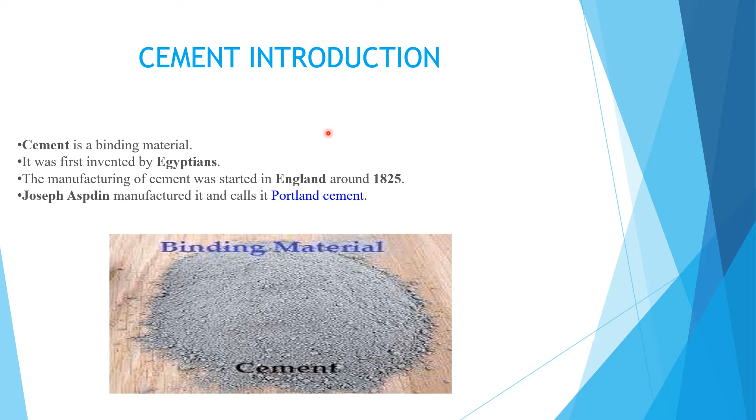What is Portland cement? Portland cement is a binding material in the form of a finely ground powder, usually gray, that is manufactured by burning and grinding a mixture of limestone and clay, or limestone and shale.

Ordinary Portland cement has been classified as OPC. OPC full form is Ordinary Portland Cement. Next, OPC 33 grade, IS 269 1989. Next, OPC 43 grade. There is also OPC 53 grade.

Because it is a major compound of this building material, cement is an extremely important construction material. It is used in the production of many structures that make up the modern world, including buildings, bridges,

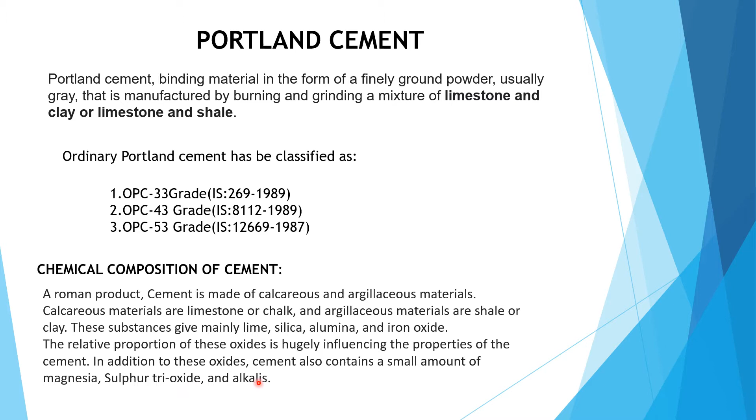Next, composition. CaO, calcium oxide, controls strength and soundness. Its deficiency reduces strength and setting time. Its composition is present at 60 to 65%.

Next, SiO2, silicon dioxide, gives strength. Excess of it causes slow setting. Its composition is 17 to 25%.

Next, Al2O3, aluminum oxide, is responsible for quick setting. If in excess, it will lower the strength. It is present at 3 to 8%.

Next, Fe2O3, ferric oxide, gives color and helps infusion of different ingredients. It is present at 0.5 to 6%.

Next, MgO, magnesium oxide, imparts color and hardness. If in excess, it causes issues. Its composition is 0.5 to 4%.

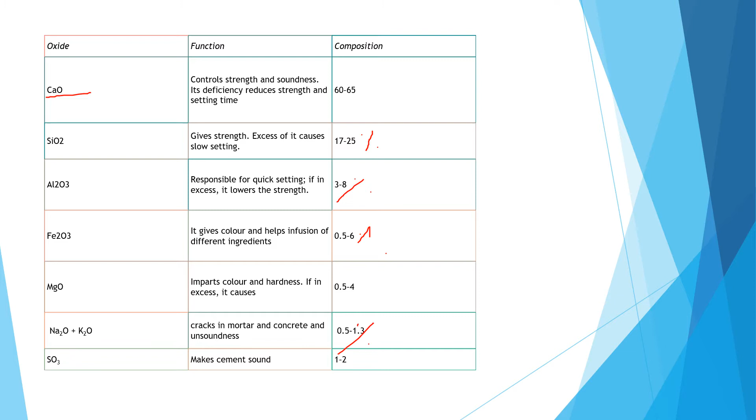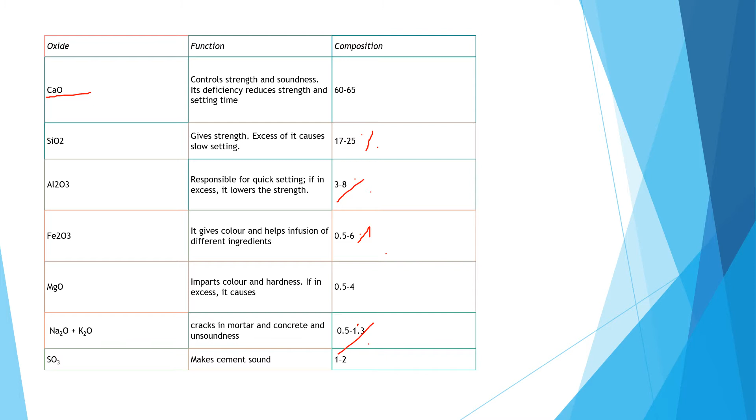Next, Na2O plus K2O, sodium oxide plus potassium oxide, causes cracks in mortar and concrete, and unsoundness. It is present at 0.5 to 1.3%. Next, SO3, sulfur trioxide, makes cement sound, present at 1 to 2%.

Now, function of ingredients. Cement ingredients: Lime, CaO. Lime or calcium oxide is a calcareous and chief component of cement, present at 60 to 65%. It is obtained from chalk and limestone and induces strength in the cement. A sufficient quantity of lime is required to make silicate and aluminate of calcium.

Next, silica, SiO2. This is the second largest component of cement, obtained from sand and argillaceous rocks. A sufficient amount of silica helps to form dicalcium and tricalcium silicate, which impart strength to the cement.

Next, alumina, Al2O3. Alumina or aluminium oxide is obtained from bauxite or clay, which contains aluminium. Its percentage limit is between 3 to 8%. It induces the quick setting properties of the cement.

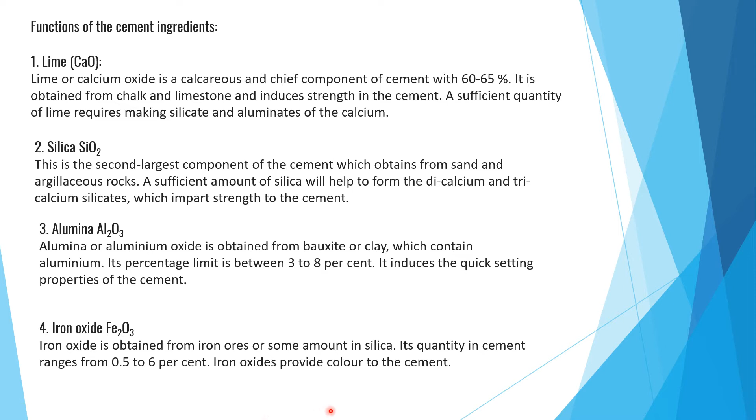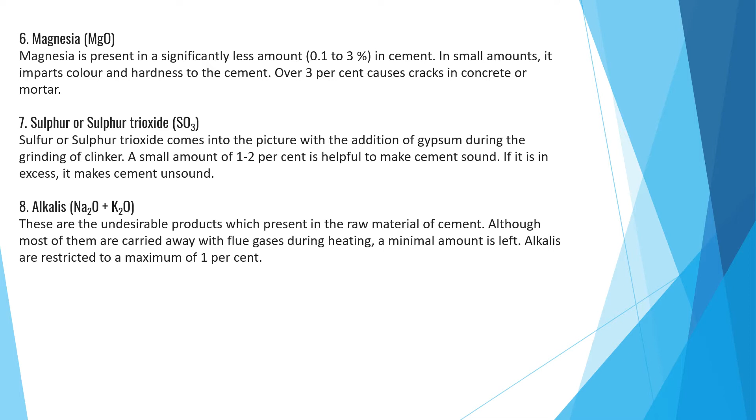Next, magnesia, MgO. Magnesia is present in a significantly less amount, 0.1 to 3% in cement. In small amounts, it imparts color and hardness to the cement. Over 3% causes cracks in concrete or mortar.

Next, sulfur or sulfur trioxide, SO3. Sulfur trioxide comes into the picture with the addition of gypsum during the grinding of clinker. A small amount of 1 to 2% helps to make cement sound. If it is in excess, it makes cement unsound.

Next, alkalis, Na2O plus K2O, sodium oxide plus potassium oxide. These are undesirable products present in the raw material of cement, although most of them are carried away with flue gases. During heating, a minimal amount is left. Alkalis are restricted to a maximum of 1%.

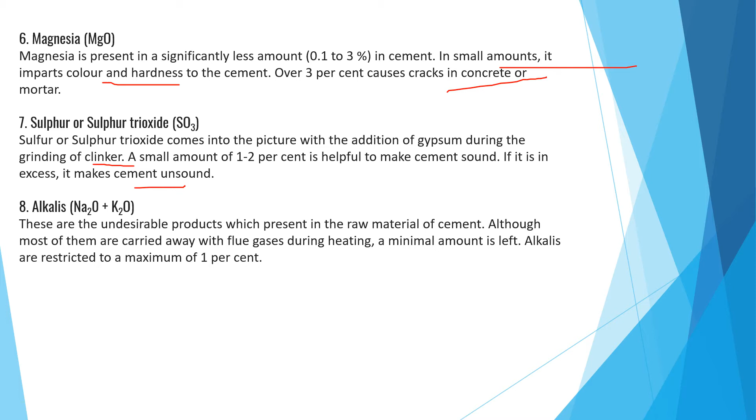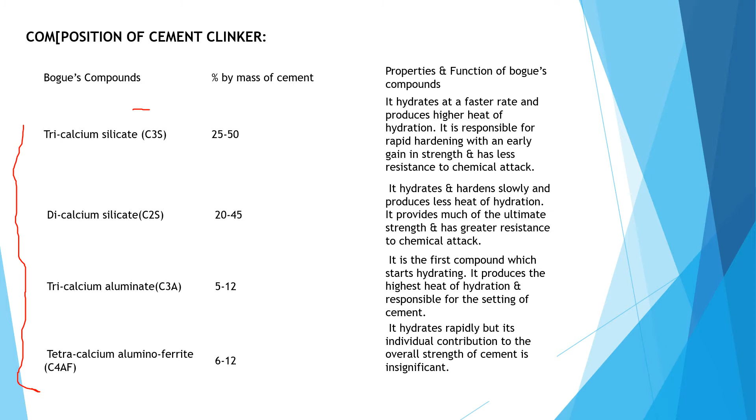Next, Bogue compounds, composition of cement clinker. These are given as tricalcium silicate, dicalcium silicate, tricalcium aluminate, and tetracalcium aluminoferrite. These are the Bogue compounds.

Now, this is the most important topic of cement: heat of hydration. The chemical reaction between cement and water is known as hydration of cement. The reaction takes place between the active components of cement, C4AF, C3A, C3S and C2S, and water.

The factors responsible for the physical properties of concrete are the extent of hydration of cement and the resultant microstructure of hydrated cement. When the cement comes in contact with water, the hydration products start to deposit on the outer periphery of the nucleus of hydrated cement.

This reaction proceeds slowly for 2 to 5 hours and is called the induction or dormant period. As the hydration proceeds, the deposit of hydration products on the original cement grain makes the diffusion of water to the unhydrated nucleus more and more difficult.

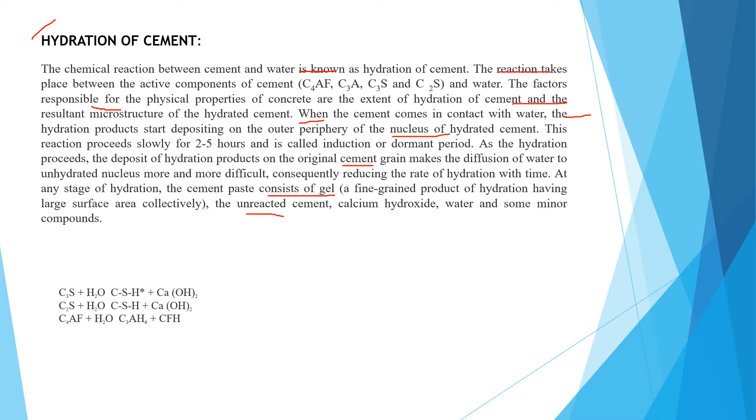Consequently, reducing the rate of hydration with time. At any stage of hydration, cement paste consists of gel, a fine grained product of hydration having large surface area, collectively with the unreacted cement.

Calcium hydroxide, water and some minor compounds. This is the reaction: C3S plus H2O, C2S plus H2O. They are given below.

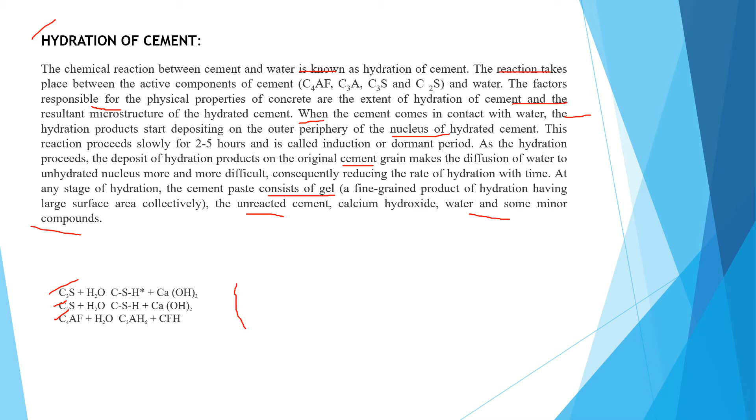Approximately 23% water by weight is required for complete hydration to complete all chemical reaction, and 15% water is entrapped in between the voids of cement. The total water required for complete hydration and workability is 38% by weight.

Manufacture of cement. Cement manufacture process involves various raw materials and process. Cement is a greenish grey color powder made of calcined mixture of clay and limestone. When mixed with water, it becomes a hard and strong building material.

It was first introduced by a British stone mason, Joseph Aspdin, in 1824, who cooked cement in his kitchen. He heated a mixture of limestone and clay powder, and this is interesting, ground the mixture into powder, creating cement that hardens when mixed with water. Cement was first used in tunnel construction in the Thames River in 1828.

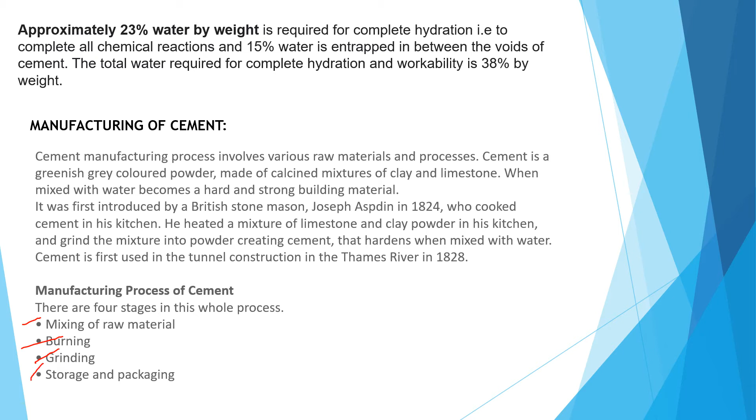Mixing of raw material. Calcium, silicon, iron and aluminium are the raw materials used majorly in manufacture of cement. There are two methods of mixing: dry process and wet process.

Dry process: both calcareous and argillaceous raw material are firstly crushed in the gyratory crusher to get 2 to 5 centimeter size pieces. Separately, the crushed material are again ground to get fine particles into ball or tube mill.

After grinding, these finely ground materials are stored in hopper. Then powder minerals are mixed, and dry raw mix is stored in silos, ready to be sent into rotary kiln.

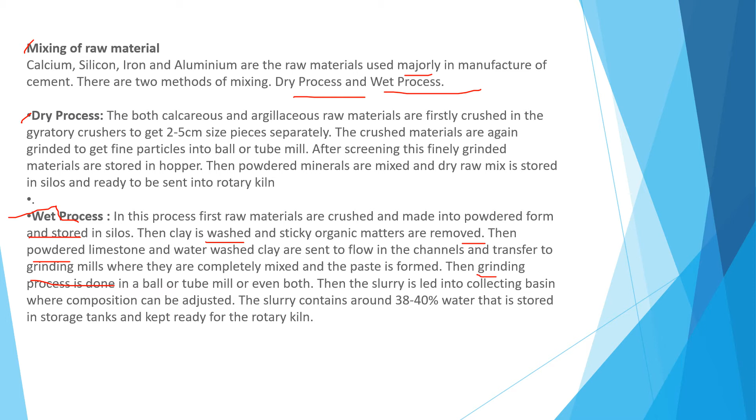Then powder limestone and water-washed clay are sent to flow into the channel and transferred to grinding mills, where they are completely mixed. The paste is formed. Then grinding process is done in a ball or tube mill, or even both.

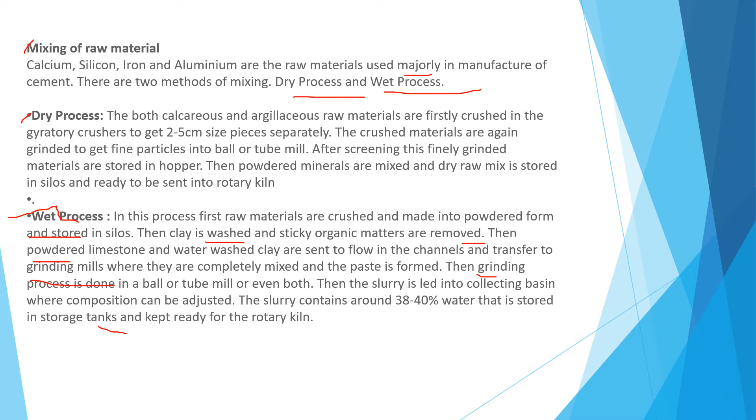Then the slurry is led into a collecting basin, where composition can be adjusted. The slurry contains around 38 to 40% water, which is stored in a storage tank and kept ready for the rotary kiln.

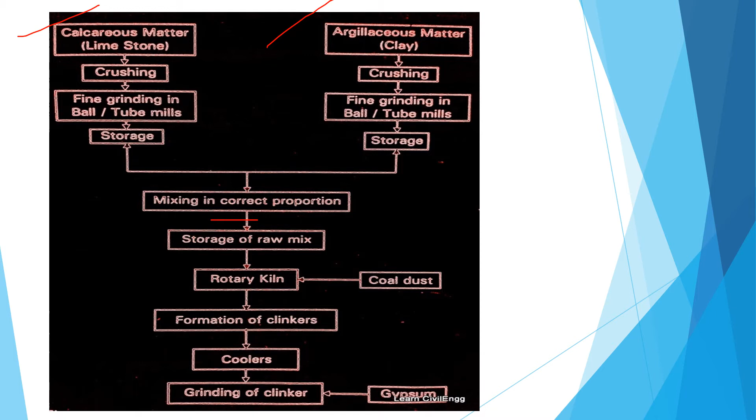This is the dry process: calcareous matter, then crushing, then fine grinding in ball tube mill, then storage. Then argillaceous materials: clay, crushing, fine grinding in ball tube mill, then storage. Then mixing of correct proportion, storage of raw mix, then rotary kilns, coal dust, formation of clinkers, grinding of clinker, then gypsum.

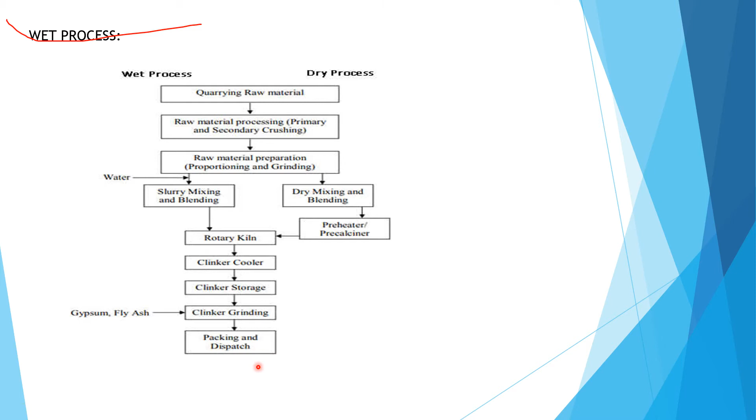This is the wet process. Quarrying raw materials, raw material process, then raw material preparation, then water added, slurry mixing and blending, then dry mixing and blending, then rotary kiln, then clinker cooler, then clinker storage, then clinker grinding, then gypsum and fly ash, packing and dispatch, market dispatching.

This is the practical experience, field test of cement. Date of manufacturing: as the strength of cement reduces with age, the date of manufacturing on cement bags should be checked. Next, cement color: the color of cement should be uniform.

It should be the typical cement color, gray with a light greenish shade. Next, whether hard lumps are formed. Cement should be free from hard lumps. Such lumps are formed by the absorption of moisture from the atmosphere.

Next, smoothness test. When cement is touched or rubbed between fingers, it should give a smooth feeling. If it feels rough, it indicates adulteration with sand.

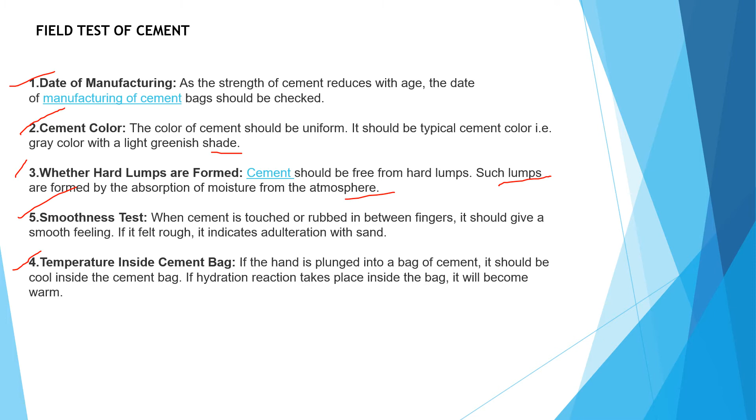Next, temperature inside cement bag. The hand is plunged into a bag of cement; it should be cold inside the cement bag. If hydration reaction takes place inside the bag, it will become warm.

This is a practical test, physical lab test. The following tests are conducted on cement in the laboratory: fineness test, normal consistency test, setting time test, strength test, soundness test, heat of hydration test, tensile strength test, chemical composition test.

First of all, fineness test. This test is carried out to check the proper grinding of cement. The fineness of cement particles may be determined either by the sieve test or permeability apparatus test.

In the sieve test, cement weighing 100 grams is taken and continuously passed for 15 minutes through standard BIS, Bureau of Indian Standards, sieve number 9.

This residue is then weighed, and this weight should not be more than a certain percentage of the original weight. Next, in the permeability apparatus test, a specific surface area of cement particles is calculated. This test is better than the sieve test. The specific surface acts as a measure of the fineness of particles of average size.

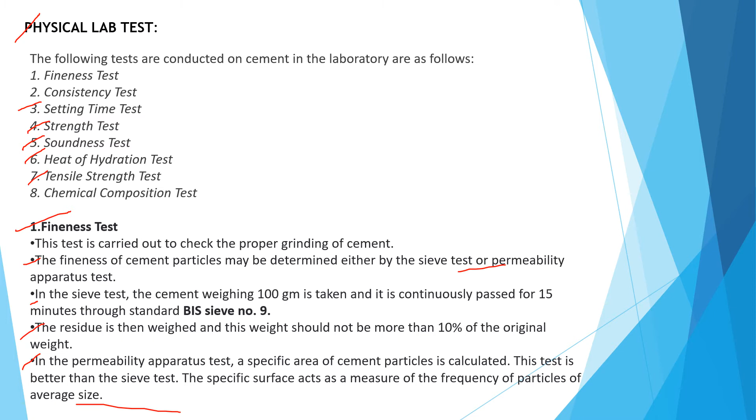Now, compressive strength test. This test is carried out for determining the compressive strength of cement.

The mortar of cement and sand is prepared in ratio 1:3 - one is cement, 3 is sand. Next, water is added to the mortar in water cement ratio of 0.4.

The mortar is placed in a mold. The test specimens are in the form of cubes, and the molds are for 70.6 mm and 76 mm cubes. The cement required is 185 grams and 235 grams respectively.

Then the mortar is compacted in a vibrating machine for 2 minutes, and the molds are placed in a damp cabin for 24 hours. Next, the specimens are removed from the molds and submerged in clean water for curing.

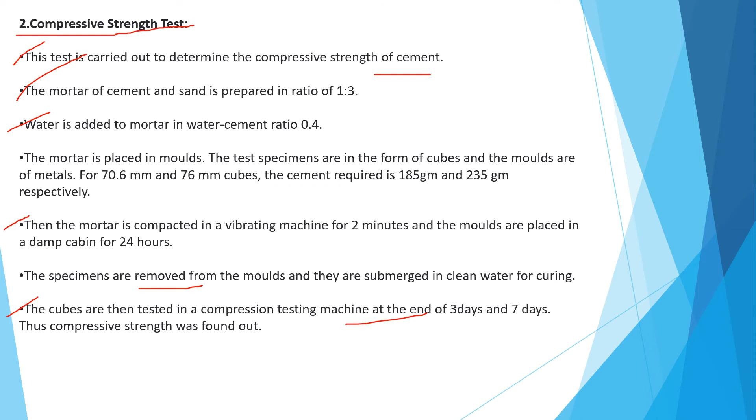Next, the cubes are taken and tested in a compression testing machine. At the end of 3 days and 7 days, the compressive strength is found out. This is the compressive strength test.

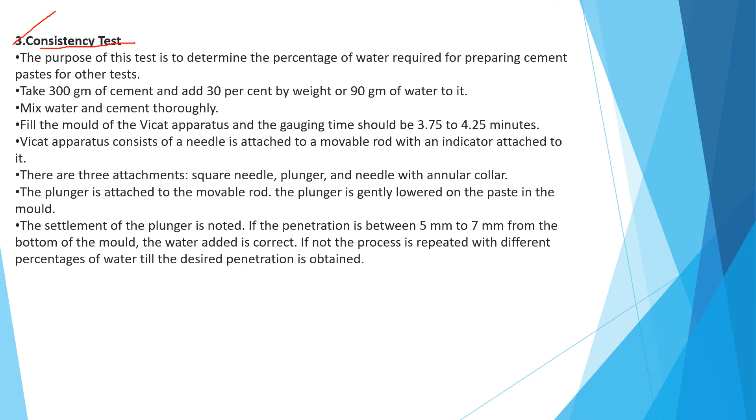Now, consistency test. The purpose of this test is determining the percentage of water required for preparing cement paste for other tests. Take 300 grams of cement and add 30% by weight, or 90 grams of water, to it.

Next, mix water and cement thoroughly. Then fill the mold of the Vicat apparatus, and the gauging time should be 3.75 to 4.25 minutes.

The Vicat apparatus consists of a needle attached to a movable rod with an indicator attached to it. There are three attachments: square needle, plunger, and needle with annular collar. Next, the plunger is attached to the movable rod.

The plunger is gently lowered onto the paste in the mold. Next, the settlement of the plunger is noted - the penetration should be between 5 mm to 7 mm from the bottom of the mold.

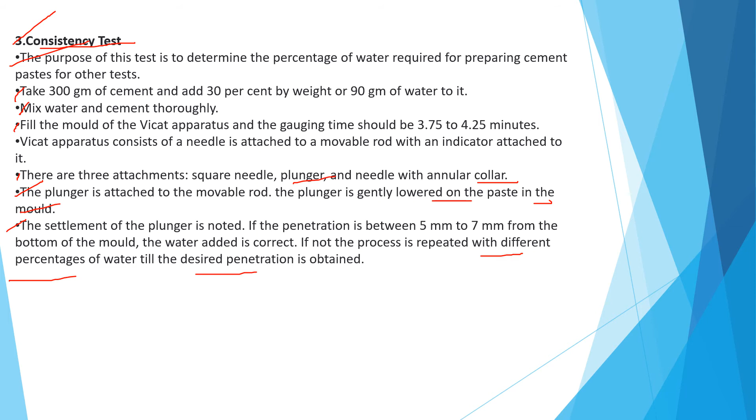If the penetration is correct, the water added is correct. If not, the process is repeated with a different percentage of water till the desired penetration is obtained. This is the consistency test.

Next, setting time test. This test is used to detect the deterioration of cement due to storage. This test is performed to find out the initial setting time and final setting time.

Cement mixed with water, and the cement paste, is filled in the Vicat mold. Next, the square needle is attached to the moving rod of the Vicat apparatus. Next, the needle is quickly released and allowed to penetrate the cement paste.

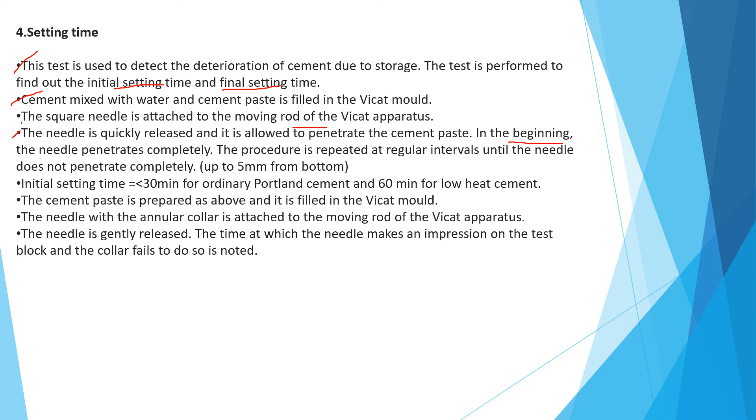This procedure is repeated at regular intervals until the needle does not penetrate completely, up to 5 mm from the bottom. Initial setting time should be not less than 30 minutes for ordinary Portland cement and 60 minutes for low heat cement.

Next, the cement paste is prepared as above and filled in the Vicat mold. The needle with the annular collar is attached to the moving rod of the Vicat apparatus, and the needle is gently released.

The time at which the needle makes an impression on the test block but the collar fails to do so is noted. This is the setting time test.

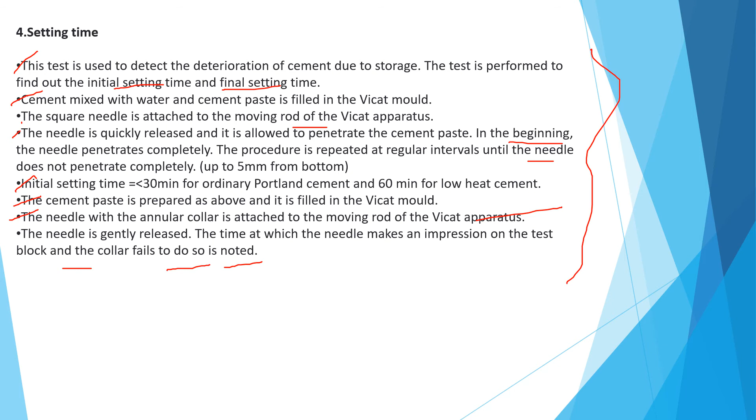Soundness test. The purpose of this test is to detect the presence of uncombined lime in the cement. The cement paste is prepared, the mold is placed, and it is filled with cement paste.

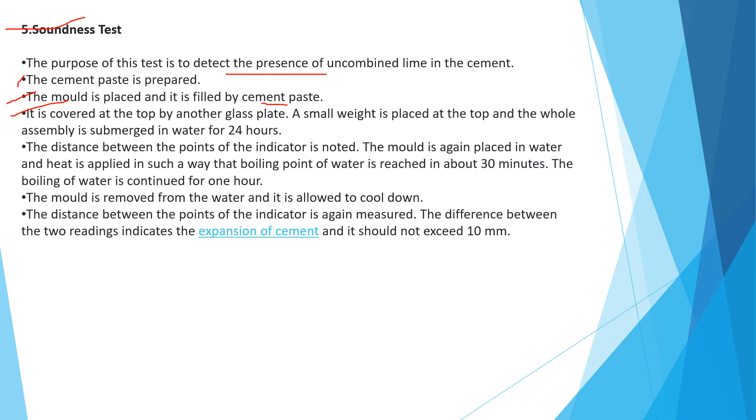Next, it is covered at the top by another glass plate. A small weight is placed at the top and the whole assembly is submerged in water for 24 hours. Next, the distance between the points of the indicators is noted. This is the soundness test.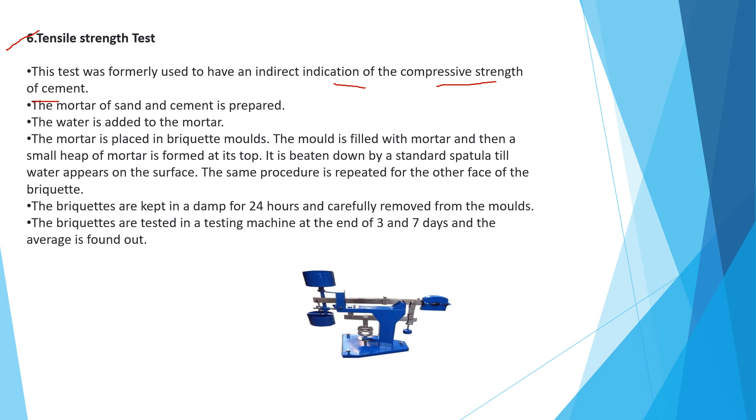The mortar of sand and cement is prepared. Water is added to the mortar. The mortar is placed in Briquette molds. The mold is filled with mortar and then a small heap of mortar is formed at its top.

It is beaten down by a standard spatula till water appears on the surface. The same procedure is repeated for the other face of the briquette.

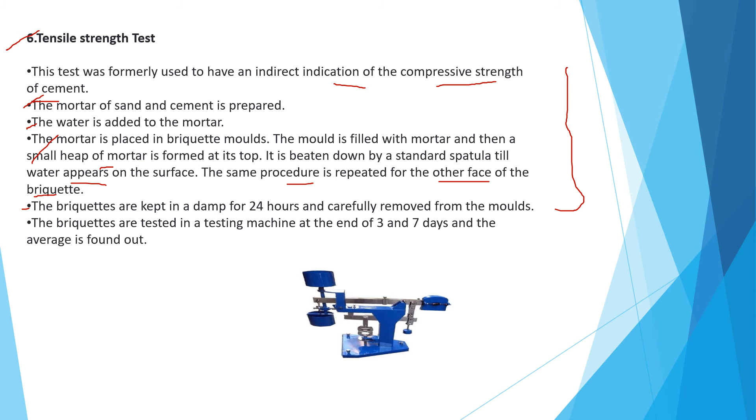Storage of cement. Storage of cement is necessary for an uninterrupted progress of work. At site, the cement should be stored properly so that it does not get in contact with dampness. Cement bags should be stored on a dry platform made of wooden planks resting on bricks, masonry, or sand aggregate.

The platform should be about 150 mm above the ground. Fresh cement should not be piled over the previous lot. Cement should be used on a first come first use basis. The number of cement bags stored at the site should be according to their per day consumption.

Next, the piles of cement should be properly covered with a tarpaulin sheet. This sheet must be properly overlapped and anchored. The temporary method of storage in wet weather should not be adopted.

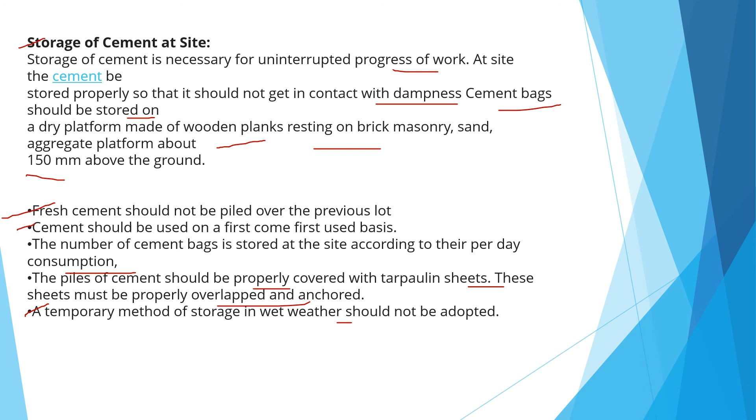Now, precautions to be taken in storing the cement. Do not stack the cement bags directly on the floor. They shall be placed on dry wooden planks. There are given below precautions to be taken in storing the cement.

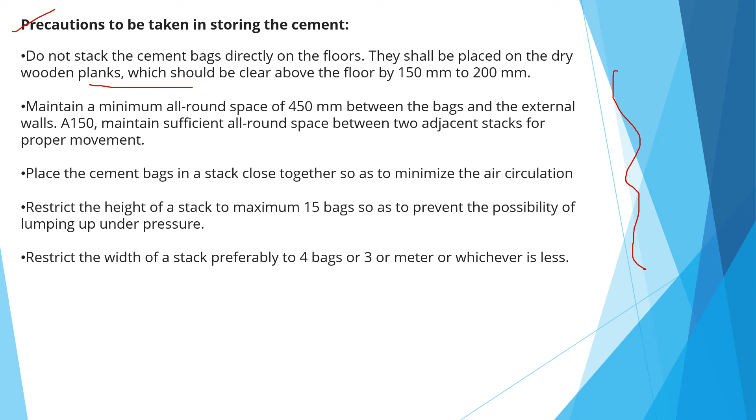This is the most practical example.

Physical properties of cement. Different blends of cement used in construction are characterized by their physical properties. Some key parameters control the quality of cement. The physical properties of good cement are based on fineness of cement, soundness of cement, consistency of cement, strength of cement, setting time

of cement, heat of hydration of cement, loss of ignition, bulk density, specific gravity, which is also called relative density.

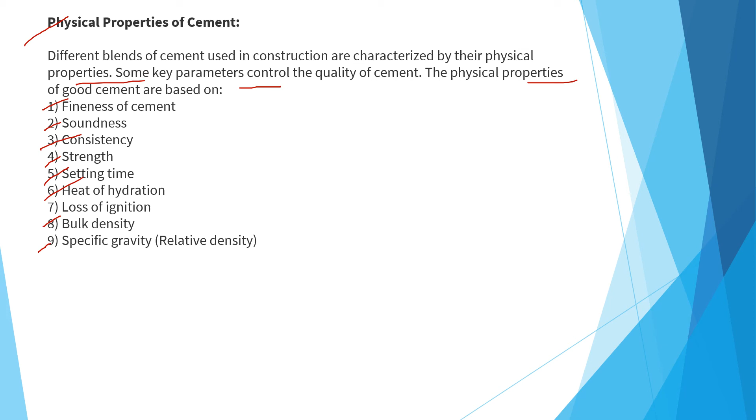Next, fineness of cement. The size of the particles of cement is its fineness. The required fineness of good cement is achieved through grinding the clinker in the last step of the cement production process, as the hydration rate of cement is directly related to the cement particle size. Fineness of cement is very important.

Soundness of cement. Soundness refers to the ability of cement to not shrink upon hardening. Good quality cement retains its volume after setting without delayed expansion, which is caused by excessive free lime and magnesia.

Consistency of cement. The ability of cement paste to flow is its consistency. It is measured by Vicat apparatus. In the Vicat test, cement paste of normal consistency is taken into the apparatus. The plunger of the apparatus is brought down to touch the top surface of the cement. The plunger will penetrate the cement up to a certain depth.

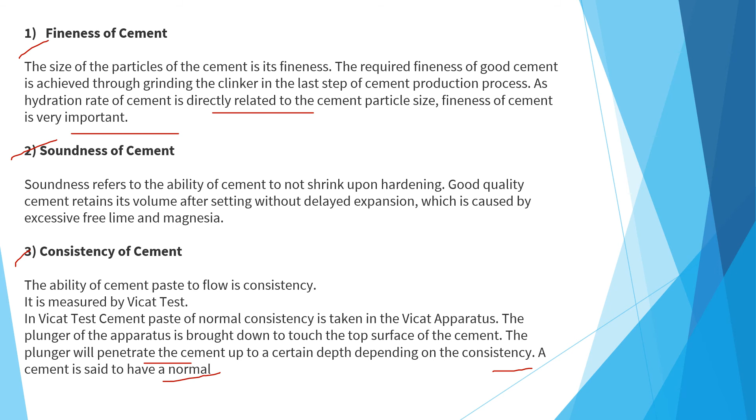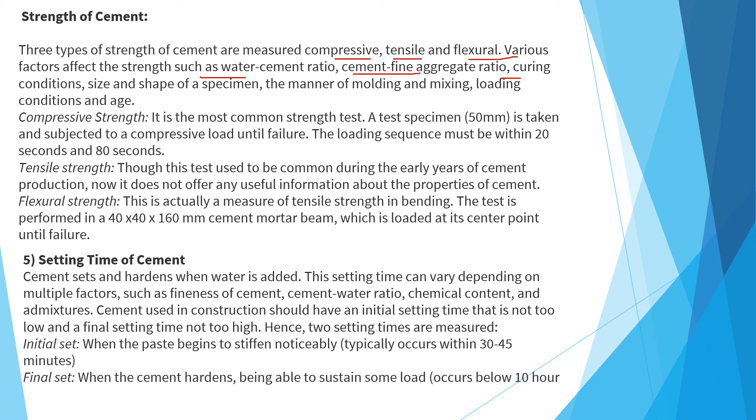Depending on the consistency, a cement is said to have a normal strength of cement. Three types of strength of cement are measured: compressive strength, tensile strength, flexural strength. Various factors affect the strength, such as water cement ratio, cement fine aggregate ratio, curing condition, size and shape of specimen, the manner of molding, mixing, and loading condition, and age.

What is compressive strength? It is the most common strength test. A test specimen of 50 mm is taken and is subjected to a compressive load until failure. The loading sequence must be within 20 seconds and 80 seconds.

Tensile strength test used to be common during the early years of cement. There is also flexural strength.

Setting time of cement. Cement sets and hardens. When water is added, this setting time can vary depending on multiple factors such as fineness of cement, water cement ratio, chemical content, and admixture. Cement used in construction should have an initial setting time

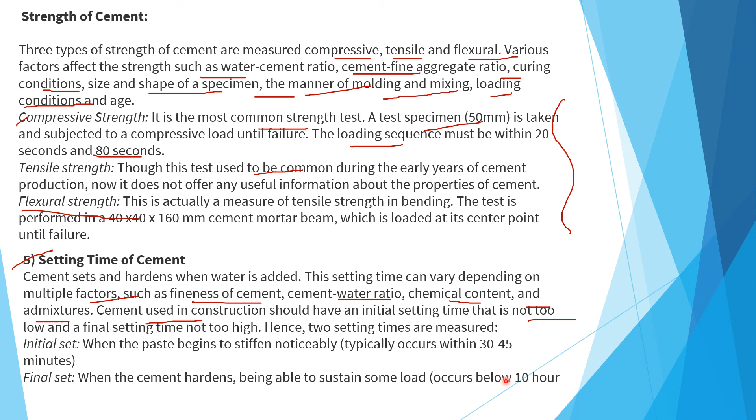that is not too low, and final setting time not too high, since the setting time is measured as initial set, when the paste begins to stiffen, noticed typically within 30 to 45 minutes. Final set, when the cement hardens and is able to sustain some load, occurs by 10 hours.

Next, this is the last and most important topic: heat of hydration of cement. When water is added to cement, the reaction that takes place is called hydration. Hydration generates heat which can affect the quality of the cement and also be beneficial in maintaining.

Curing temperature during cold weather can be helped by this heat. On the other hand, when heat generated is high, especially in large structures, it may cause undesirable stress. The heat of hydration is affected most by C3S and C3A presence in cement, and also by water cement ratio, fineness, and curing temperature.

The heat of hydration of Portland cement is calculated by determining the difference between the dry and the partially hydrated cement, obtained by comparing these at 7th and 28th days.

Next, bulk density. This is the most important topic. When cement is mixed with water, the water replaces areas where there would normally be air. Because of that, the bulk density of cement is not very important.

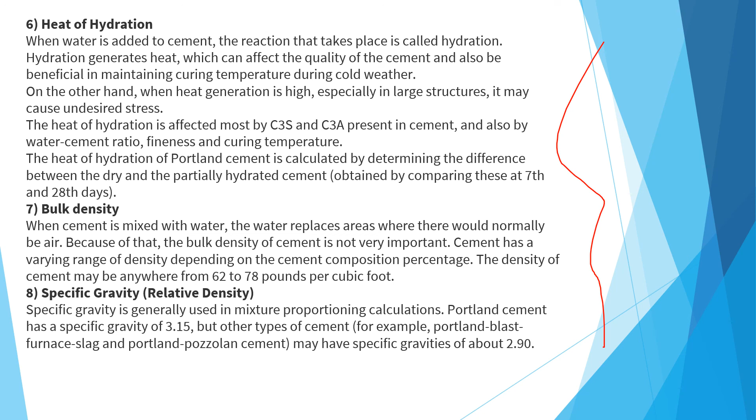Look at this, you can see this. These are the 1, 2, and 3 most important topics of cement.

Next, uses of cement. It is used in mortar for plastering, masonry work, pointing, etc. It is used for making joints for drains and pipes. It is used for water-tightness of structures. It is used in concrete for laying floors, roofs, and construction of lintels, beams, stairs, pillars, etc.

It is used where a hard surface is required for the protection of exposed surfaces of structures against destructive agents of the weather and certain organic and inorganic chemicals. It is used for precast pipe manufacturing, piles, and fencing posts.